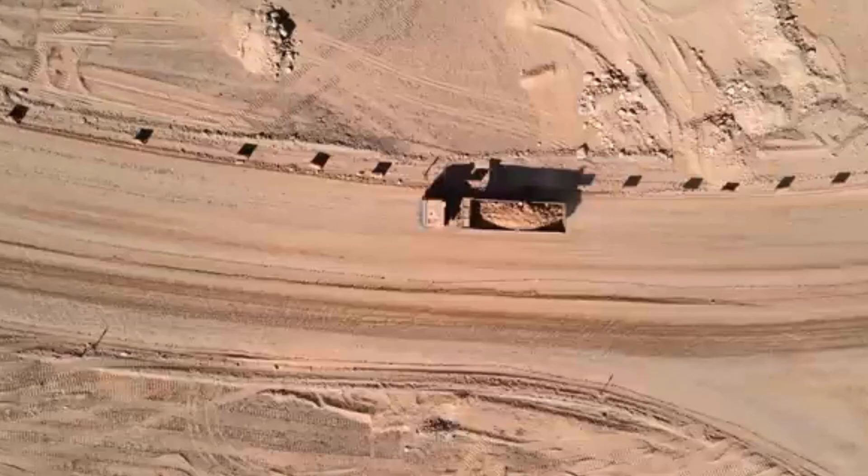Gaze upon this image of the Arabian desert, and you'll witness one of history's most ambitious construction projects taking shape. A 200-meter-wide trench stretches from the Hijaz Mountains to the Gulf of Aqaba. And that's not all. Observe this, the initial phase of what will become the largest set of foundations ever constructed.

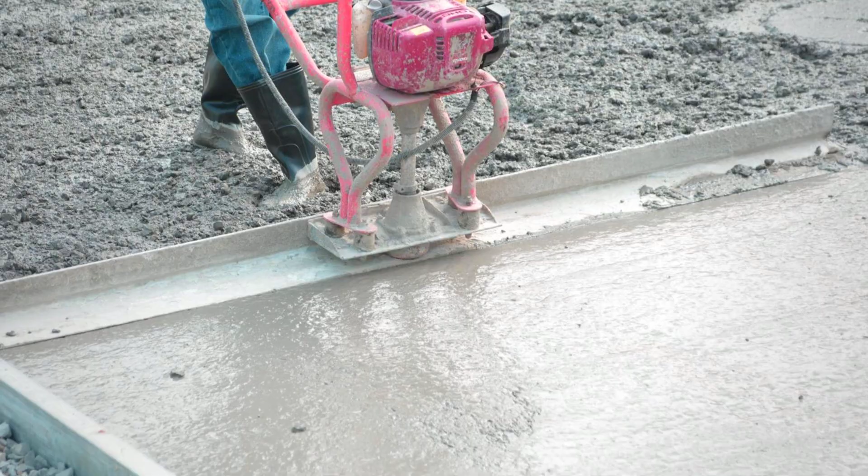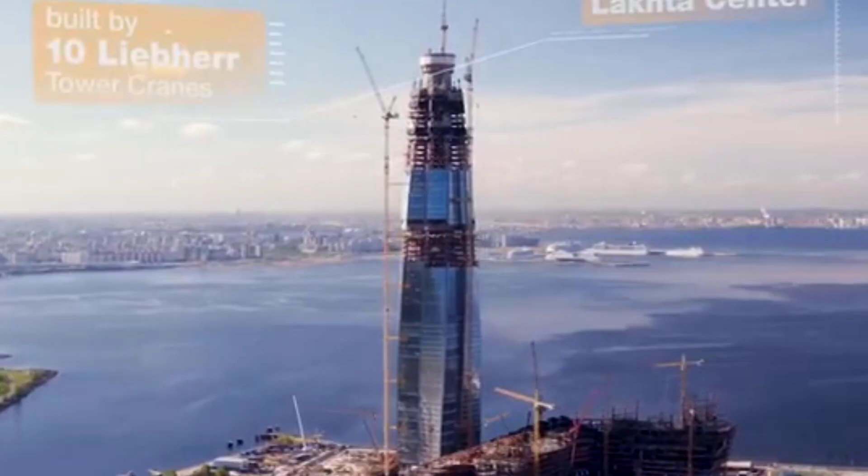Now that the concrete has cured, the first vertical structures are poised to emerge. In essence, the endeavor that everyone dismissed as impossible, as something that could never be built, is actually materializing. Or is it? While proponents suggest vertical construction could commence by the end of this year, experts in real estate warn that hope is not a strategy. For every sign of progress, there are persistent budget issues threatening to bring the entire project to a standstill.

Saudi Arabia has reportedly asked consulting firms to conduct a strategic review of the line, and rumors even circulate that the entire undertaking has been cancelled. But what do we truly know? The year 2026 is poised to be a make-or-break moment for the line. This is when deadlines must be met, and progress will be measured in height, not just hype.

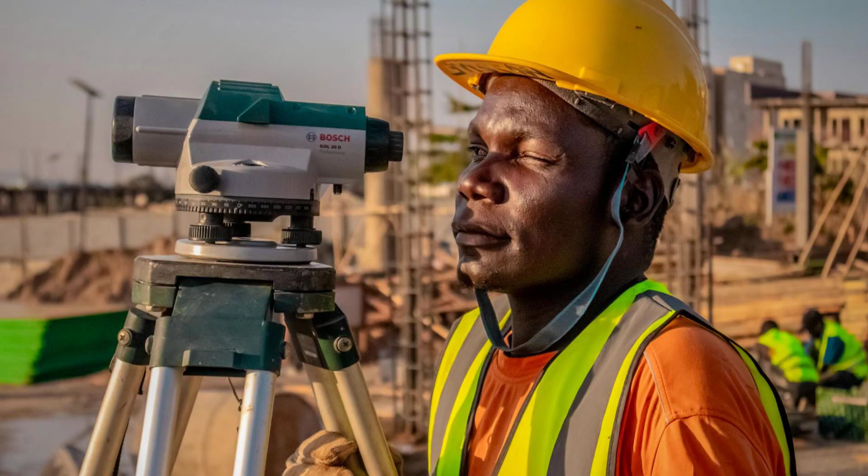Regardless of your opinion on this project, or even its realism, a nation's future hinges upon it, and a leader has staked his entire reputation on its success. They declare it can be done, but such declarations cannot persist indefinitely without tangible proof. So, will it ever truly be built?

Let's find out. For those unfamiliar, this is the line, Saudi Arabia's blueprint for a colossal linear city. If, or when, it's completed, it will serve as the capital of Neom, a vast new region in the country's northwest, conceived by Crown Prince Mohammed bin Salman. It forms a cornerstone of his Vision 2030, an ambitious plan to diversify the country's economy away from oil dependency by, you guessed it, 2030.

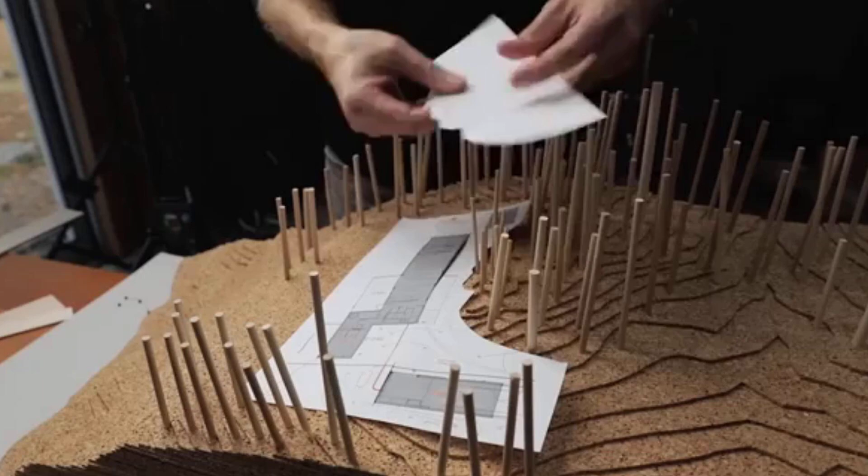The figures behind the line are staggering. It's projected to be 200 meters wide, 500 meters tall, and span 170 kilometers across the desert. The sheer scale is difficult to comprehend. To provide some perspective, consider this small Lego model of the line, built to just 2 bricks high. This model represents a mere 0.03% of the actual line's size.

To further illustrate, this would be the Empire State Building, which the line would absolutely dwarf in height. Just imagine its incredible length. The burning question, shared by many around the world, is how on earth do you construct something of this magnitude? Let's begin with the fundamentals.

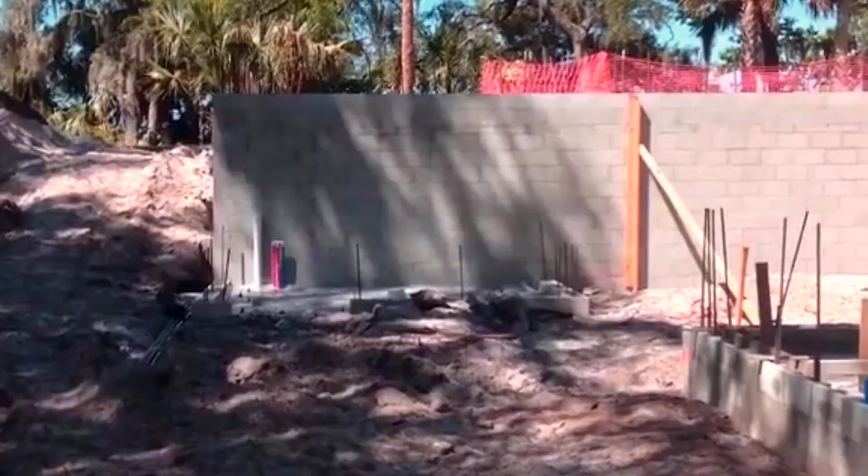The line traverses wildly varied terrain, hard mountain rock, soft open desert, and salty coastal plains. To build anything across such a diverse landscape, you first require a uniform, stable foundation. That's where the foundations come in. Imagine building a skyscraper on unstable ground. Much of the line's site sits atop quaternary deposits, essentially loosely deposited, uncompacted material unsuitable for bearing significant weight. Beneath this material, however, lies solid bedrock, an ideal surface for construction.

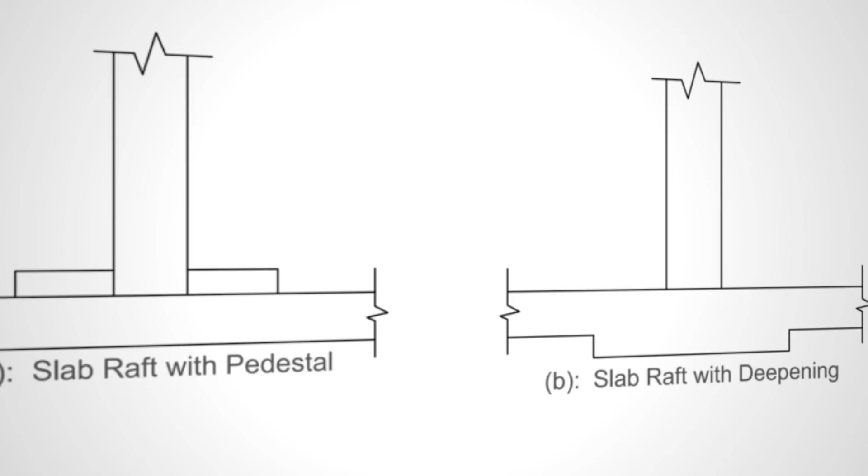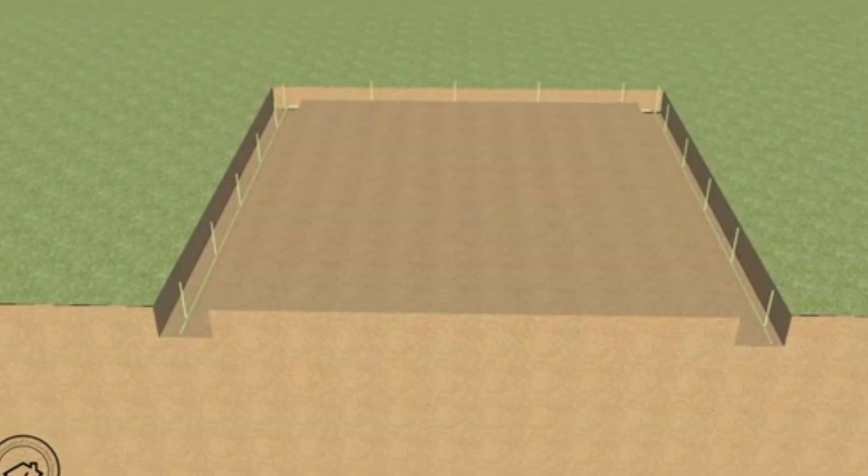To reach this bedrock, engineers employ what's called a piled raft foundation. This involves creating a robust concrete slab at ground level, with the building's weight transferred through piles driven deep into the stable bedrock below, bypassing the weaker upper layers. The result is an exceptionally strong and stable base for any skyscraper. This might sound straightforward, but it is far from simple. Designing foundations for any structure, let alone one of this size, demands immense calculation.

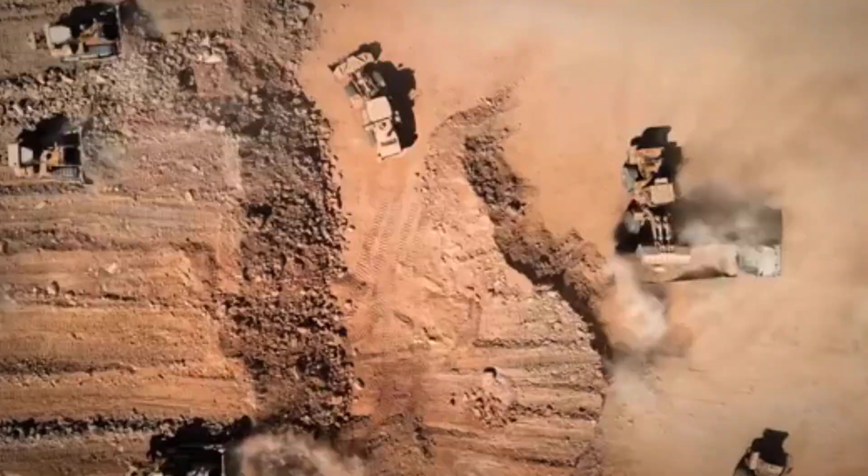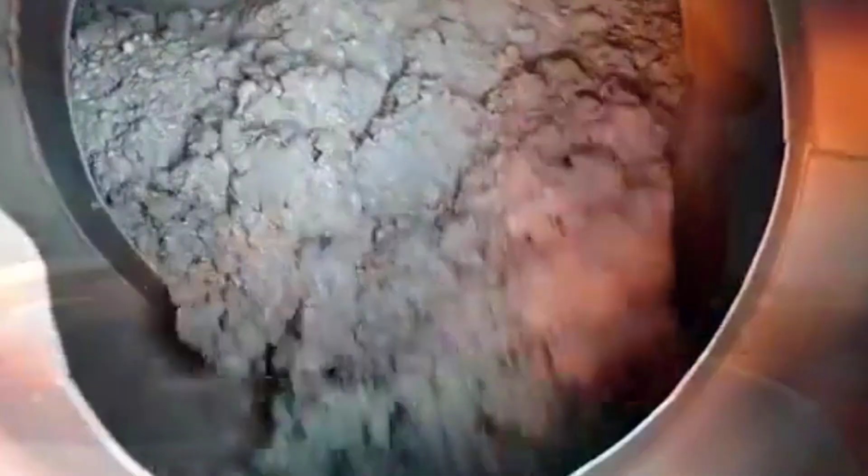The work currently underway on the line surpasses anything ever seen before. Phase 1 alone has involved driving over 16,000 piles up to 70 meters deep into the Saudi sand. This equates to nearly 1,000 kilometers of drilling, consuming up to 3.5 million cubic meters of concrete. On top of this, an 8-meter-thick raft will form the base for all subsequent construction promised by this colossal project.

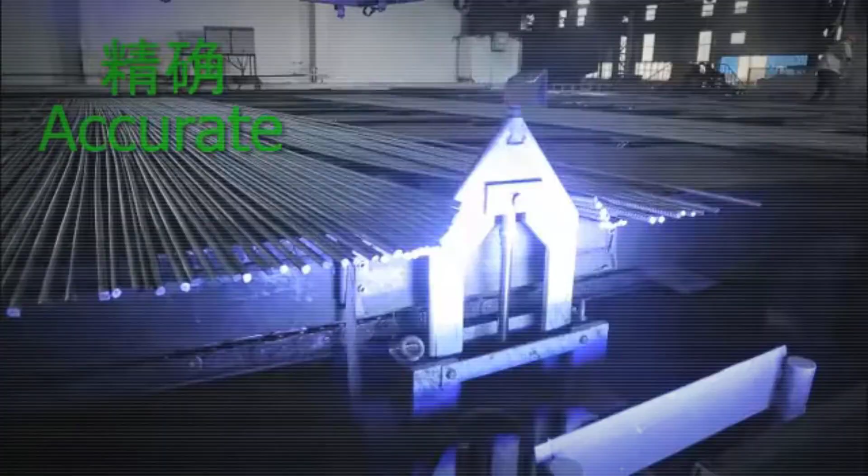To achieve this, an automated factory is mass-producing tens of thousands of 32-meter-long rebar cages to reinforce each pile. Simultaneously, drilling rigs utilize GPS for precise boring of the holes into which these rebar cages are lowered. A biodegradable liquid is then pumped into the holes to prevent collapse before the concrete is poured. Engineers aren't just contending with soft earth. Being so close to the sea, this stretch also requires protection from highly saline groundwater.

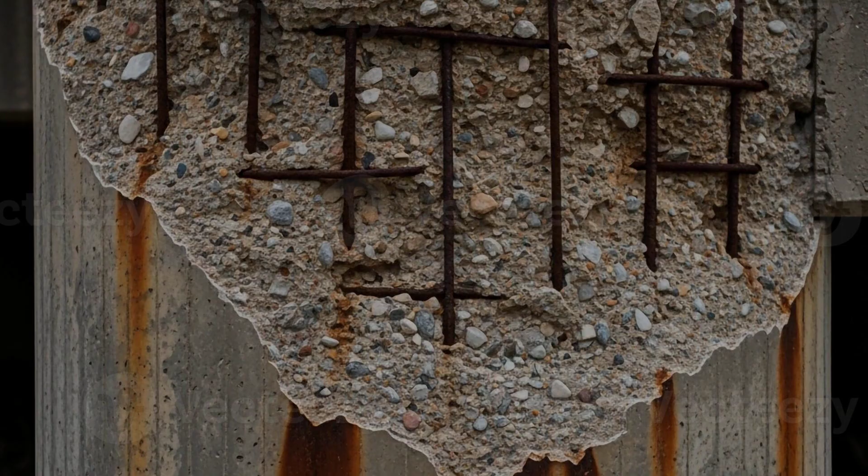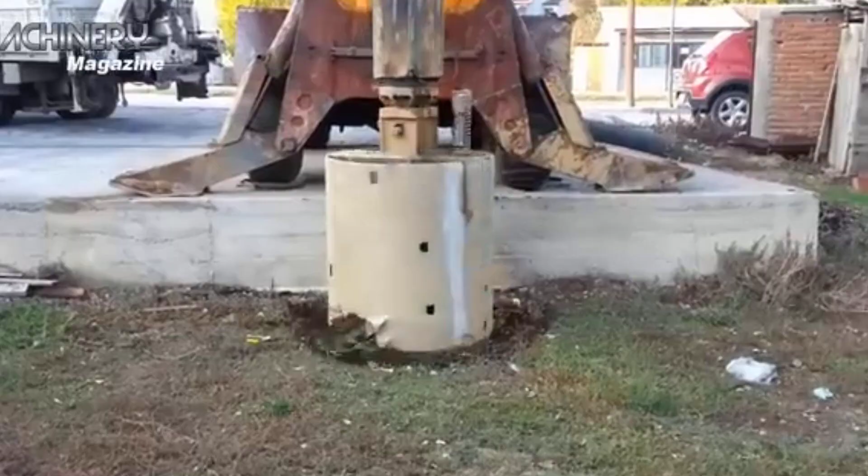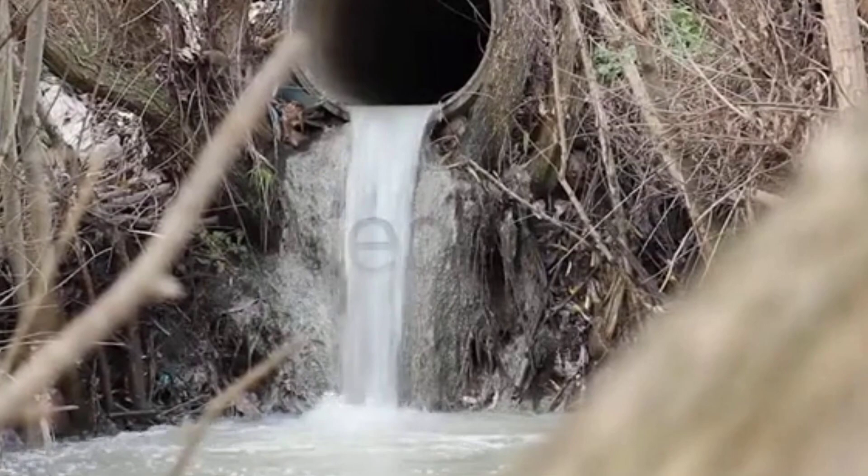If left untreated, it could corrode the steel cages and concrete piles over time. To combat this, the world's largest dewatering system has been implemented. 500 wells were drilled along this section of the line, each fitted with a water pump at its base. Water is extracted at a rate of 90,000 cubic meters per hour, directed towards a settlement pond where its quality is rigorously checked. From there, the water is filtered and discharged into the sea via a series of pipes.

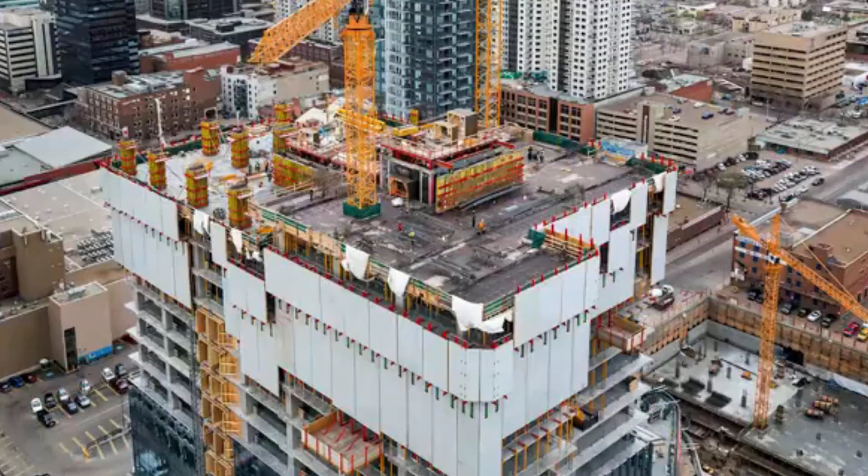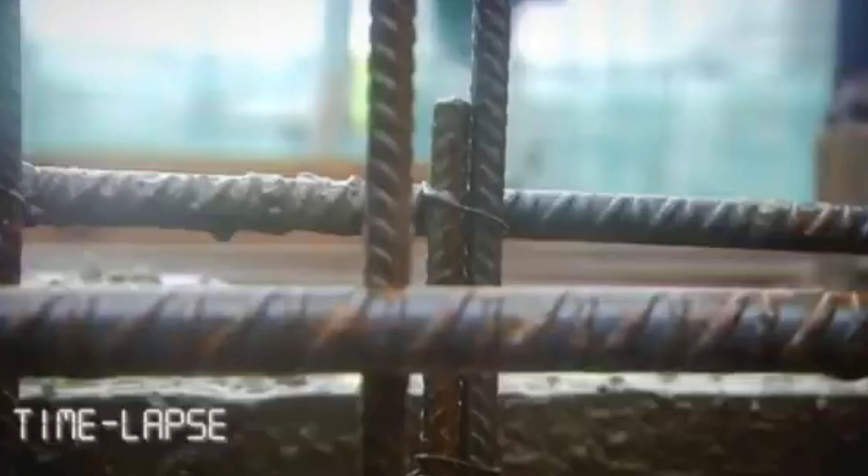Work on the foundations for Phase 1 is nearing completion, meaning the project is about to reach its next major milestone, going vertical. On a typical skyscraper, this involves constructing the core, the building's essential backbone. These cores, often seen rising on construction sites, are formed by pouring concrete into a mold that is incrementally pushed upward by hydraulic jacks. However, the line introduces a unique twist.

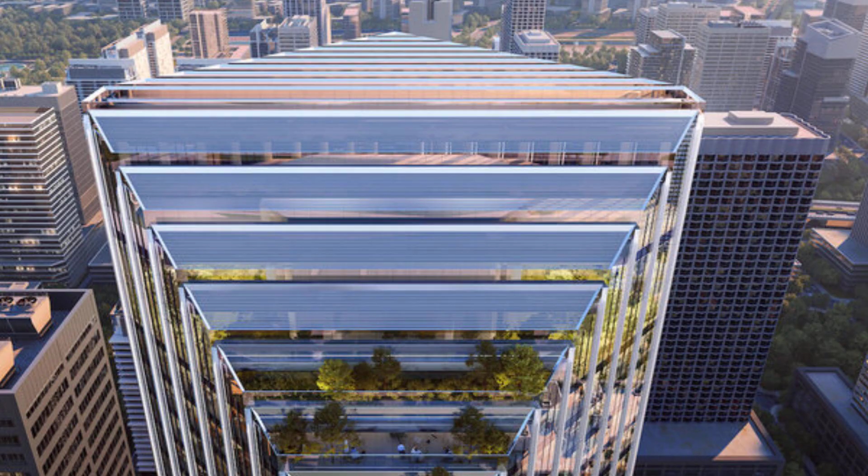Remember, the line is a city, a framework, not a single monolithic building. It doesn't possess one continuous core stretching for 170 kilometers. Instead, it's composed of thousands of individual cores, each built much like any other. Crucially, these cores support the primary decks of the structure, which will serve as the main streets and avenues, with the cores acting as cross streets. Imagine the Manhattan grid, but folded and stacked vertically.

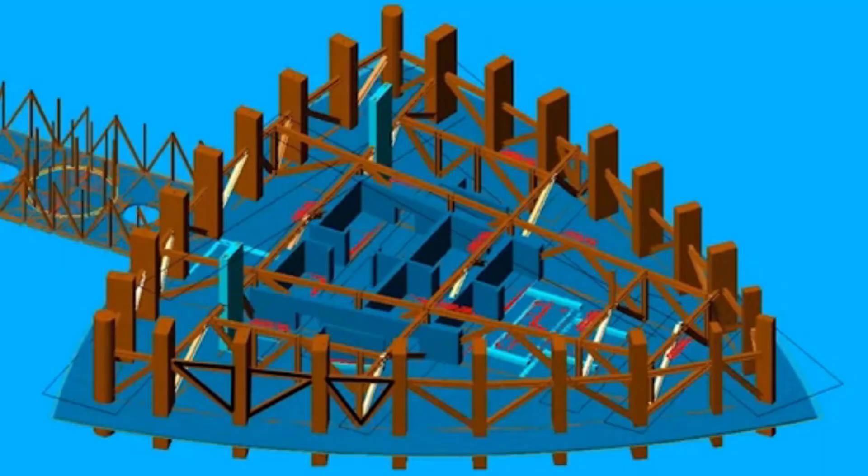Within this framework, the city will truly come alive, housing schools, hospitals, homes, and transport infrastructure, everything required for a functioning metropolis. This framework is what is currently under construction, 2 rows of 500-meter tall towers. Phase 1 will see 4.8 million tons of steel outrigger beams hoisted into place to support the 5 decks running through each module.

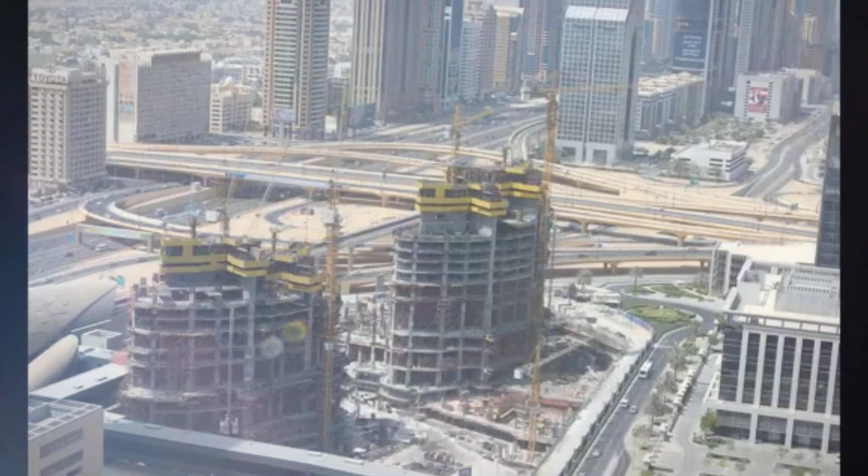Typically, in skyscraper construction, steelwork and cladding begin to be added at an earlier stage, following the core up the building. This is why 2026 is so anticipated. Things should really start to take shape, and we should see rapid progress. But can it actually be built? That's the trillion-dollar question. Let's start with concrete.

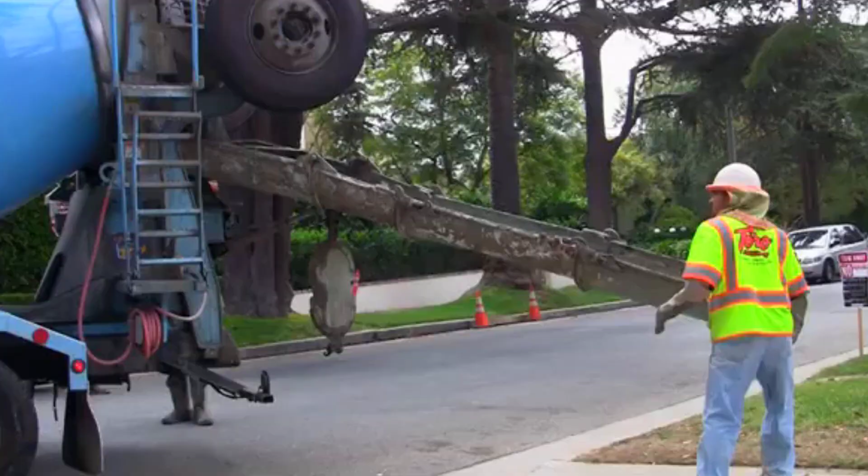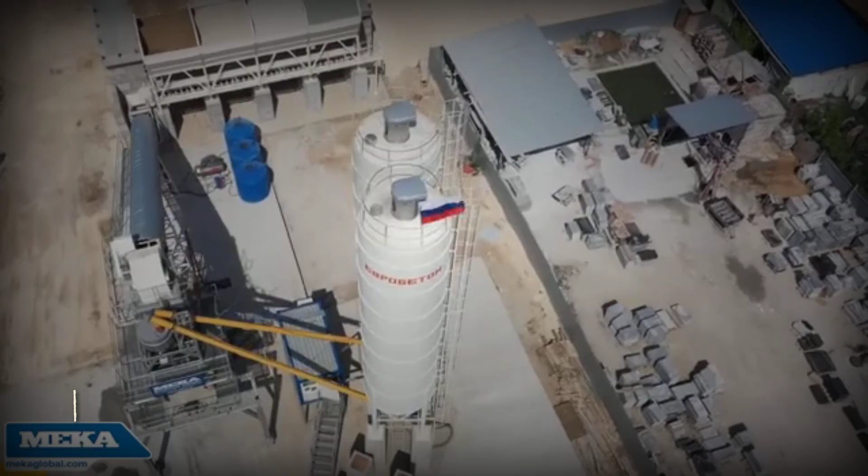Pouring concrete at scale is incredibly complex. Pour it too slowly, and it sets unevenly. Pour it too fast, and the ingredients can separate. If the mixture is too wet, the concrete will be brittle; too dry, and it will resemble Swiss cheese. Essentially, it demands absolute consistency over extended periods.

Millions of tons of concrete have already been poured, which is a solid track record. But this has primarily occurred on the coast, with easy access to supply lines. The city still has a long way to extend into a vast hinterland with no local material access and a near-total lack of one vital ingredient: water.

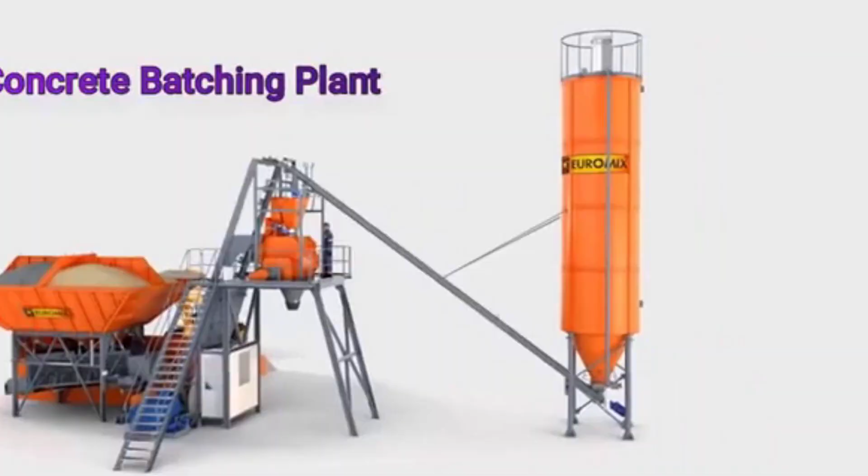There is a plan. It begins at Oxagon, another of NEOM's megaprojects, where a massive desalination plant is intended to pump billions of liters of seawater to reservoirs distributed along the city's length. These reservoirs would feed a $190 million network of concrete factories capable of producing 20,000 cubic meters of concrete daily. But there's a significant catch: none of this currently exists.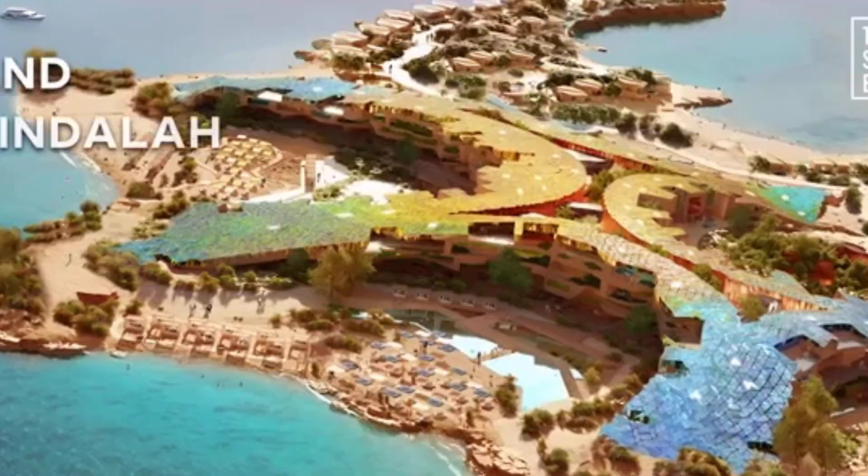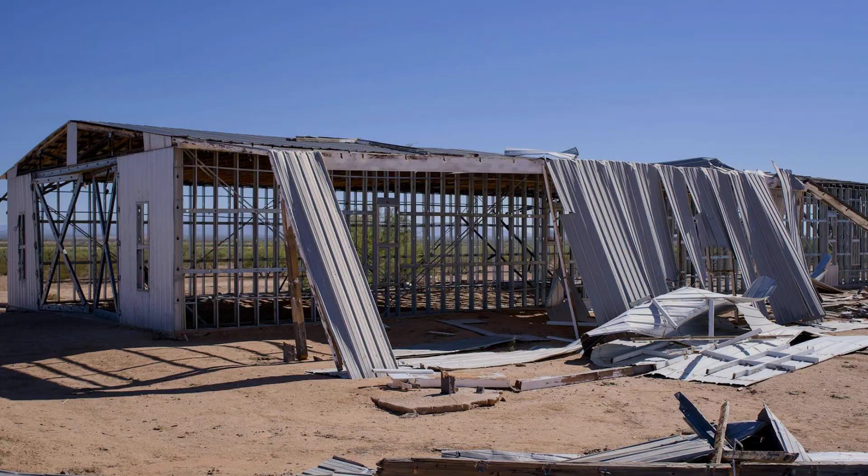Work on Oxagon only began in mid-2025. Those vast concrete plants are still a distant prospect, and concrete is currently produced locally, with water shipped in by tankers, by no means a scalable solution. In fact, unconfirmed reports have recently surfaced suggesting the desalination plant has been quietly abandoned.

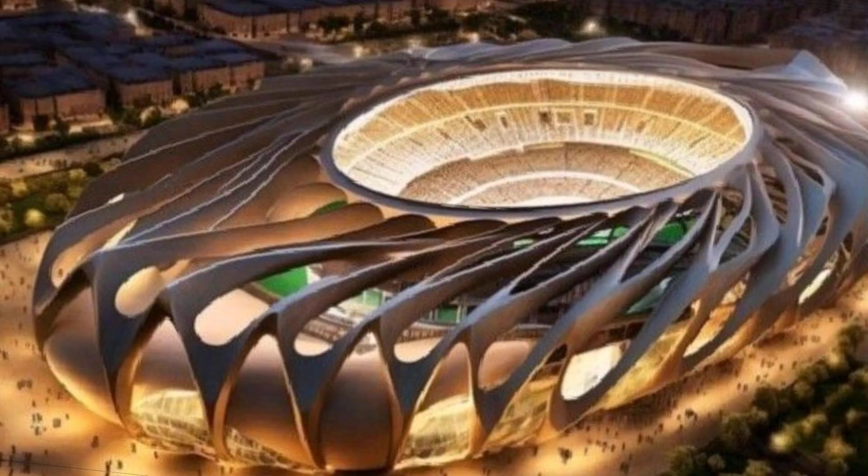This isn't merely nitpicking. The line has extremely ambitious targets to meet in less than 9 years. The NEOM Stadium is slated to be suspended 350 meters in the air inside the line and is set to host games at the 2034 FIFA World Cup, games for which people will be buying tickets. For this to be credible at this stage, one would expect to see far more evidence of scalable activity. Instead, as of late 2025, the project appears to be constructing anything, just to gain momentum and silence critics.

So, what exactly are they building? What is this Phase 1 we keep mentioning? When you saw the massive trench in the desert, what did you imagine would be built? The entire structure? Half of it? At least a quarter? No.

Despite constructing that enormous 170-kilometer-long cutting through the desert, they are actually only building Phase 1, a mere 2.4 kilometers of the line. While this is still an absolutely massive building in its own right, it accounts for less than 1.5% of the entire line structure. This might feel a little underwhelming, but there is a strategic rationale.

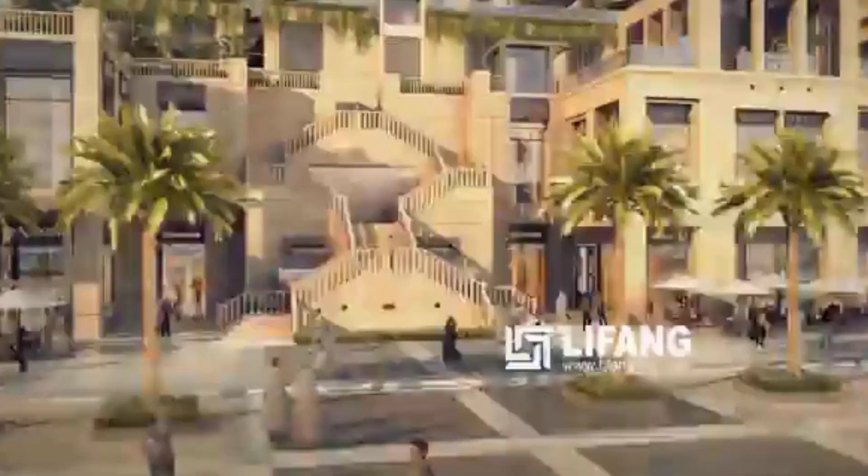The NEOM team is using Phase 1 to construct some of the city's largest and most spectacular anchor assets. An anchor asset, once completed, attracts investment and development to the surrounding area. A prime example is the High Line in Manhattan, a derelict elevated railway transformed into a public park, which subsequently revitalized the surrounding area into one of Manhattan's most expensive and coveted neighborhoods.

The entire structure of the line is divided into 800-meter-long modules, akin to neighborhoods or city blocks. Phase 1 will see 3 of these modules built near the western end of the site, featuring some of the city's most spectacular elements.

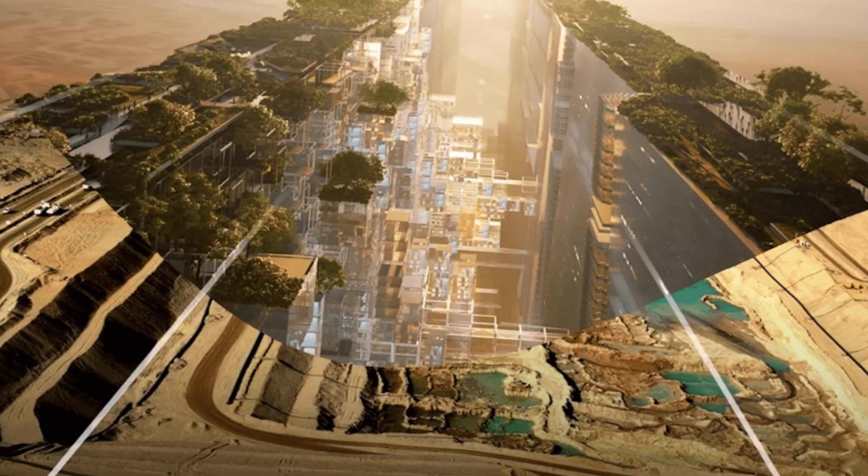These include a man-made marina capable of hosting the world's largest cruise ships, the 46,000-capacity NEOM Stadium, and a vast chandelier hanging below, designed to welcome people into this colossal structure. NEOM's stated goal is to fund and build a collection of anchor assets around which subsequent phases will organically develop. In many respects, this strategy makes a lot of sense, being sophisticated and based on industry-wide standards.

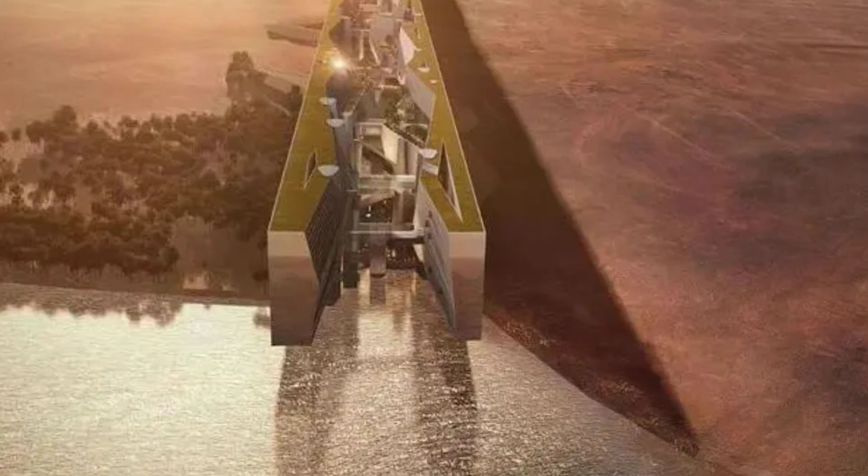Where it becomes questionable is that this is a 170-kilometer-long city in the desert. The line is intended to be a revolutionary city that redefines urban living in the most audacious way possible, forever changing how we perceive our cities. For an ambitious leader with unchecked power, it's precisely the kind of project to capture the world's imagination. But for everyone else, it carries immense risk.

Development is ultimately a game of finances, and in this case, the purse is controlled by one of the planet's wealthiest individuals. However, fully realizing Crown Prince Mohammed bin Salman's vision will require more capital than he alone possesses, necessitating significant buy-in from private markets, external capital partners, and foreign investors. These investors generally seek more realistic assumptions.

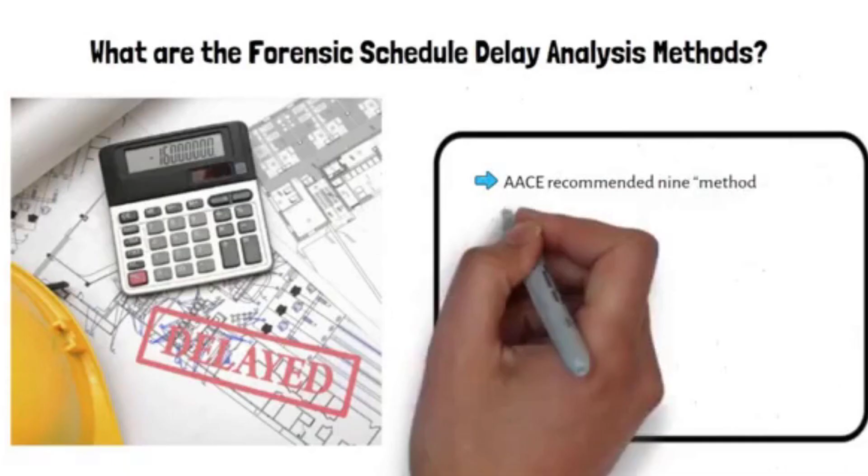Furthermore, the project's leadership faces the challenge of pushing back against some of the prince's more fantastical visions. A simple change of mind, like wanting a curve or a jump over an obstacle, could translate into billions of dollars in cost overruns and months or even years of delays, which is not conducive to large-scale development.

Ever since its announcement, the line has faced intense criticism regarding its alleged human cost. There have been reports of homes, schools, and hospitals being cleared, allegations of modern-day slavery on sites, and orders to execute tribal people who refuse to relocate. These allegations are vehemently denied by NEOM and the Saudi Arabian government.

Beyond this, it has been exceedingly difficult, if not impossible, for journalists to gain real access to the sites, though relationships with the press are handled very differently in Saudi Arabia. Yet, this wall of silence casts a shadow over the project's fundamentals. Many individuals involved with the line were contacted for this video, and almost none would speak for fear of reprisals.

The hard truth is that as Saudi Arabia strives to become a more progressive society and transform its culture as part of Vision 2030, it will need to master its relationship with the free press beyond its borders. People asking questions about this project often encounter a clash of cultures. They seek to understand why costs have tripled, why elements have been replaced or changed, or why there are no updates on certain aspects, but they are dealing with a place accustomed to not having to answer to anyone.

If the line does get built, it won't be the first showpiece city constructed from scratch. Consider Brasilia, founded in 1960, which replaced Rio de Janeiro as Brazil's capital. Like the line, it was built in what was perceived as a remote and inhospitable location. And even more like the line, the city's plan was unlike anything seen before.

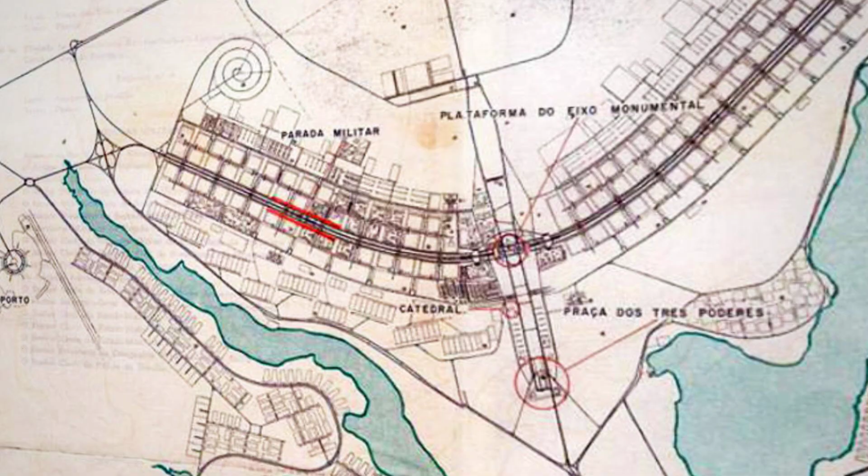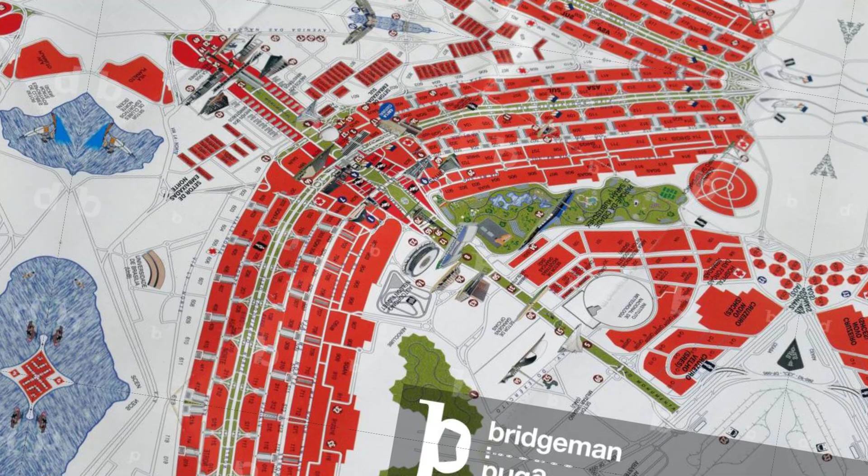Designed in the 1950s, the jet age, when rapid advancements in aviation symbolized the cutting edge and the futuristic, Brasilia was meant to represent a nation reborn in the modern era. It was designed like an airplane, government buildings in the cockpit, housing on the wings, and a military district in the tail. The fuselage formed a monumental axis uniting the entire city.

Just like Brasilia, the line is an attempt to create a new, forward-looking symbol for a nation. But rather than gazing skyward, it draws inspiration from the pages of science fiction. An academic and author, Chris Hables Gray, who has written extensively about cyberpunk, received an email from a Saudi Arabian woman inviting him to discuss input on the line's aesthetics, making it clear that the Crown Prince was very interested in cyberpunk.

The line itself appears to be partly based on elements from Snow Crash, a novel where a virtual reality world was constructed around one long, almost infinite virtual street. Even if you're not familiar with the term, you've likely encountered the cyberpunk aesthetic everywhere, from video games to TV shows and films like Blade Runner.

Chris was one of a handful of people asked to provide background research for what is now known as the line. He collected numerous images and quotes from cyberpunk and related science fiction writings that he believed would be useful, specifically focusing on urban planning and ideas of cyberpunk and other punk genres. He recounted that the prince attended a demonstration or exhibition of these ideas, primarily featuring large images.

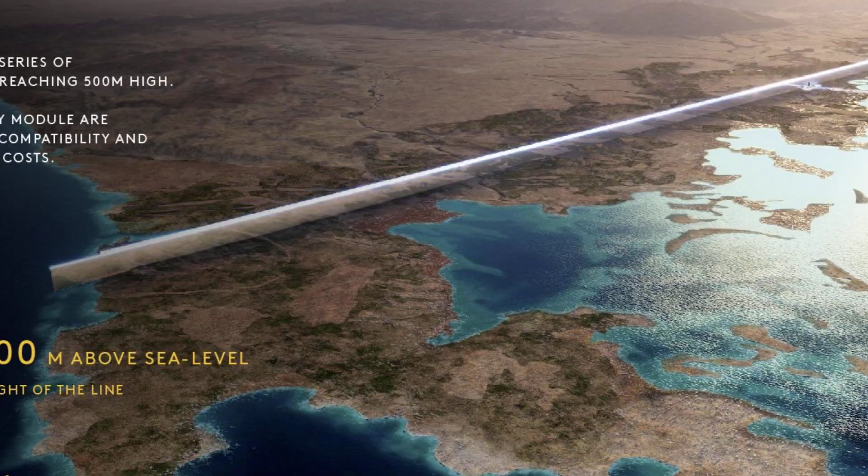The prince then selected what he liked, and these choices were theoretically incorporated into the plans for building the entire city. Looking at some of the images Chris shared with Neom, you can see the clear link with the concept images released in the early stages of the line.

If there's one aspect of the line that seems directly from a video game, it's the distinctive mirror finish covering every exterior surface of the building. Reflective glass is not new, but it comes with disadvantages. The type used on buildings is made by transferring metal deposits onto glass through a highly charged gas, a process called sputter coating. While efficient for large-scale production, it's slightly translucent and reflects, at best, around 40% of light. In other words, it's never as good as a true mirror.

This is Maraya, a remarkable building constructed in 2019, widely believed to be a key inspiration for the line. Initially, it was clad in polished metal sheets, but these quickly deteriorated in the harsh, sandy environment. For a perfect mirror finish, you need a mirror. But mirrors are fragile. In the extreme desert heat, the lamination that binds them can fail, and the silver coating can peel away from its backing. To produce something that could withstand these conditions, an entirely new type of mirror was developed.

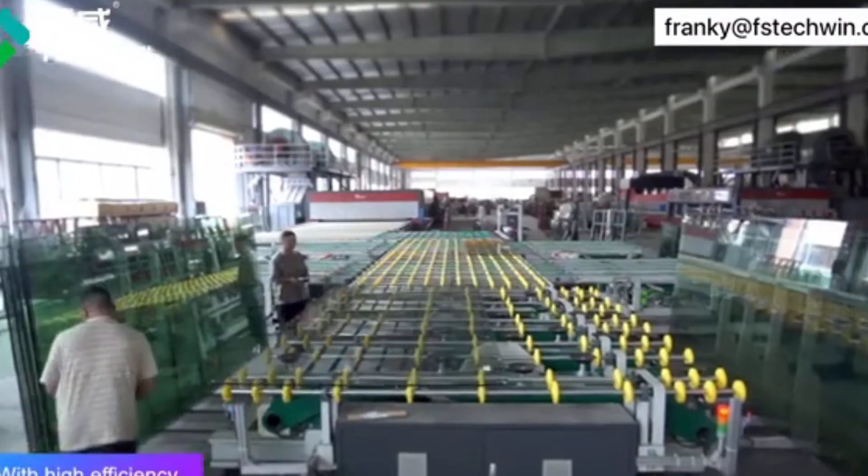Normally, mirrors are made from standard glass, large sheets are produced, cut to size, and then coated with a silver finish. However, to survive extreme temperatures, this glass would also need to be heat-treated or tempered. The mirror coating could only be applied after tempering, but tempered glass cannot be cut. So, to produce the mirrors for Maraya, the entire production line had to be reversed. The raw glass was first precisely cut to its final size, then heat-treated, before being returned to its initial factory for the new mirror coating.

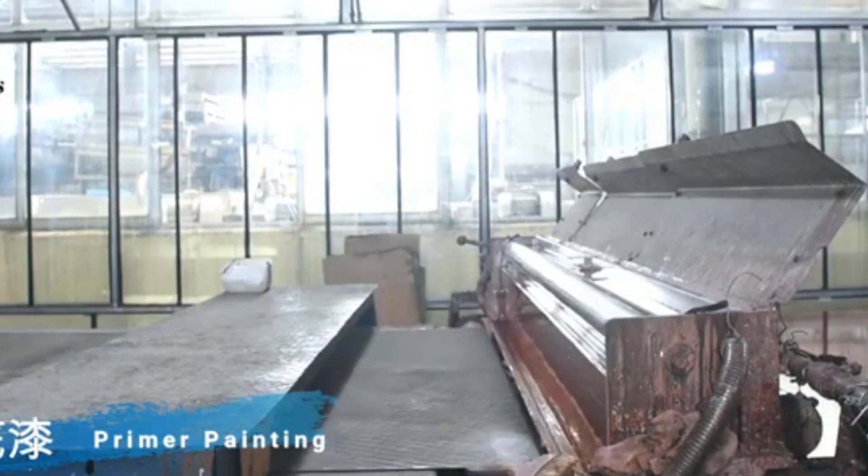Along with a silver spray, the mirrors were coated with copper to provide resistance against intense solar radiation. The result is what you see today, a surface with over 90% reflection that can withstand some of the Earth's harshest conditions.

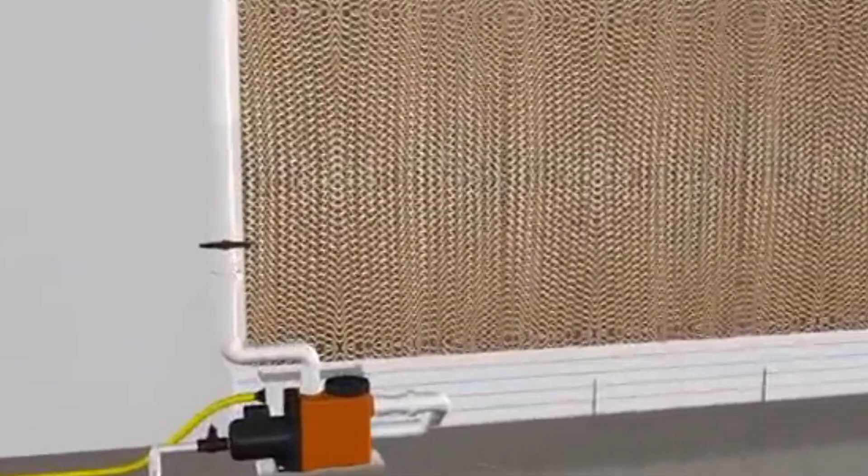Speaking of harsh conditions, here's a major one: the line will not be air-conditioned. That's right. The absence of outdoor cooling was confirmed in a presentation by the line's chief development officer earlier this year. It's crucial to remember this isn't a building, it's a city. So, inside your home or office, you can have as much air conditioning as you desire. But out on the streets, you will be subject to the ambient desert temperature. And if that weren't challenging enough, it could be exacerbated by the urban heat island effect, a phenomenon where cities absorb and retain heat much more dramatically than rural areas.

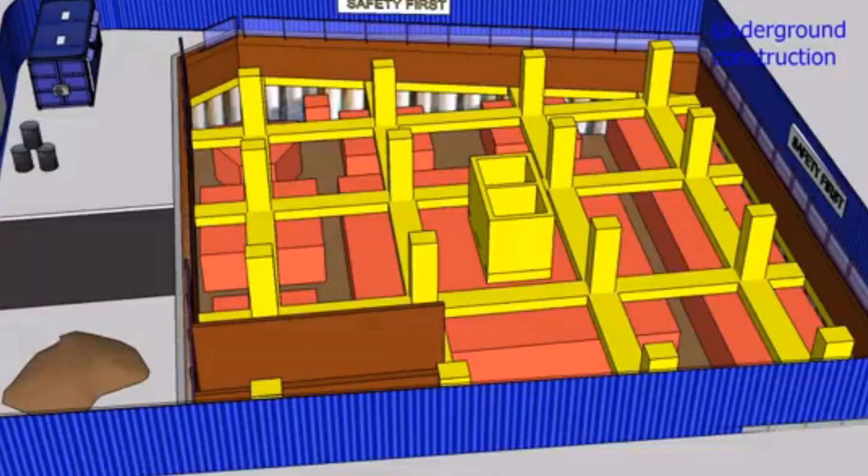In hot weather, for instance, London can be up to 5 degrees Celsius warmer than the surrounding countryside due to its heat-absorbing concrete. And the line will feature a lot of concrete, steel, and glass. This is a significant concern, but currently, all we have is an assurance that this has been thoroughly considered and modeled, and that it will all be fine.

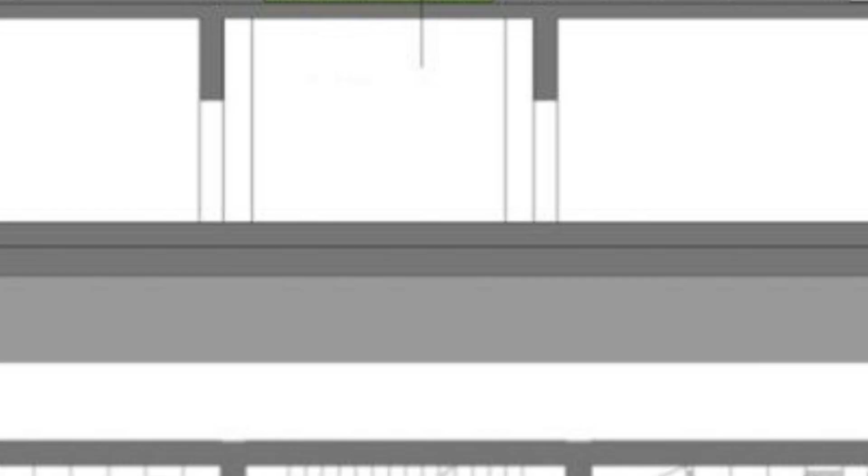One argument made is that the mirror finish of the line's walls will reflect so much light that the city won't absorb much heat. We are also told the glass will be breathable, to allow air to pass through. Whether this means the vast walls will have vents or if an entirely new material is being invented remains unknown. It doesn't exactly inspire optimism.

It appears life in the line will largely be confined within its modules. Each is designed to contain all basic amenities, accessible within a short walk. Essentially, it's an extension of the 15-minute city concept seen in places like Copenhagen or Zurich. But for this to be feasible, you must be able to move around without melting. And if you need to travel further, you'll require some form of transportation.

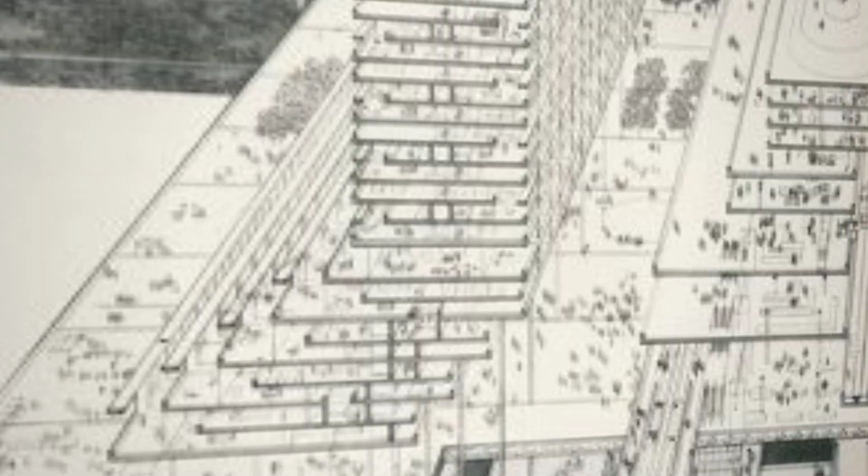Before delving into how transport will function, we need to understand why the line is, well, a line. Apparently, we've been designing our cities incorrectly. Consider London, home to about 8.6 million people, just shy of the 9 million people who could ultimately reside in the fully realized line. London sprawls across a sizable chunk of southeast England. Now, compare that to the line.

The argument is that London represents the old way of building cities, unplanned, sprawling, and inefficient. Wouldn't it be much neater to house all those people in this sleek, technologically advanced structure? To achieve this, one key element needs to be eliminated: cars. Cars, while a major contributor to Saudi Arabia's wealth, are being dismissed as obsolete for the future.

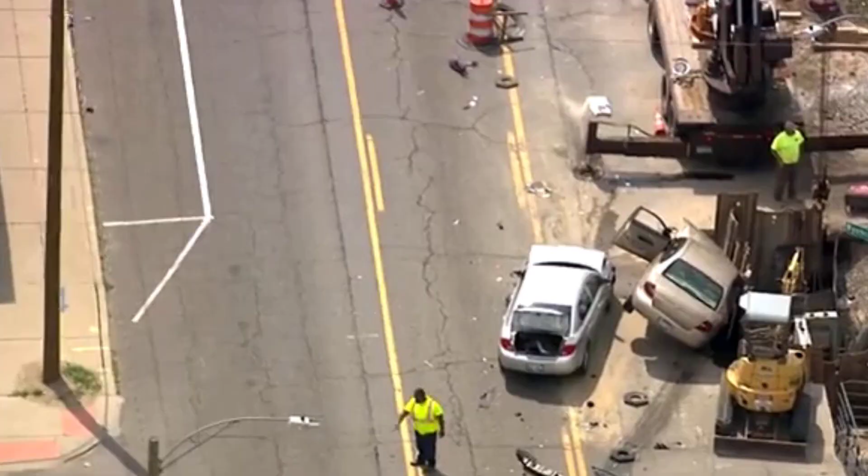They consume vast amounts of space, cause accidents, require parking, and transport few people. The line promises something far superior. At its base, you'll find the line's high-speed railway, connecting the international airport to its western tip. It's supposedly designed to complete the entire 170-kilometer journey in just 20 minutes, faster than any existing train today.

Above this, the line's general mass transit system, a suburban-style rail network, will have stops every 1.5 kilometers. Then, distributed between the line's 5 primary decks, a light rail network will stop every 100 meters. A series of escalators and lifts will connect people between the different levels. This transport system is touted as one of the line's major selling points, claiming its linear shape offers a better, more efficient urban concept. But is that truly the case?

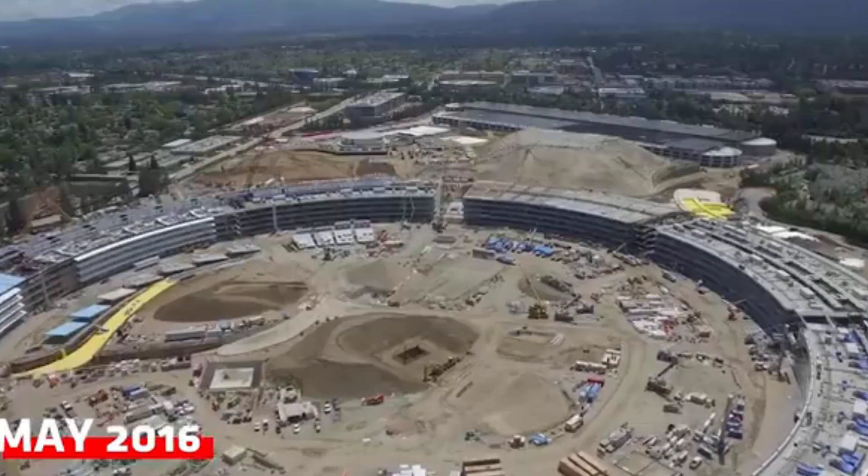To answer that, consider Apple Park, Steve Jobs' last great creation. It shares similarities with the line in its simple, all-encompassing structure, but it's circular. This was deliberate, as a circle embodies certain ideals. In a circle, there's no hierarchy, no top or bottom, no coveted corner offices, and the space inside is equally shared. It's also efficient for navigation. The furthest anyone has to travel is a straight line from one side to another, the building's diameter.

Now, look at the line. To travel anywhere, you primarily have only two options: head left or head right. In contrast, a radial city offers movement in every direction, meaning the average journey will always be shorter. Let's revisit those transport options. We're told we'll be able to traverse the entire 170-kilometer length of the line in just 20 minutes. The China Railway CR450AF, the world's fastest train, though still in development, will have a top speed of 450 kilometers per hour. Even this train could not cover the line's length in 20 minutes, without accounting for acceleration or deceleration.

Moreover, this high-speed line will only have 2 stations, making it largely impractical for residents in the middle of the city. For them, the alternative is a suburban train that stops every 1.5 kilometers. How efficient is that? So, where do we stand? We began this discussion by noting that the line and the broader NEOM project are part of Vision 2030, a plan to completely re-engineer the Saudi economy by the end of the decade and safeguard the country from economic ruin. That clock is ticking, and we don't even know if Phase 1 will be completed by then. Just a few months ago, a detailed investigation by the Financial Times claimed that top-level executives were privately admitting this project was impossible.

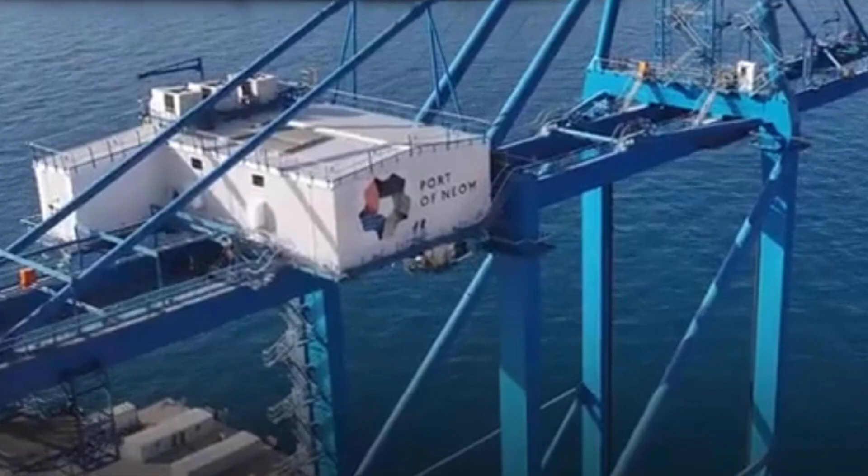This is truly the crux of the entire scheme. When announced in 2021, the line's ambition was so audacious it made headlines worldwide. It compelled everyone to debate what our cities should look like. It inspired children and engaged them in the story of our future. It was so radical it felt almost confrontational, daring people to dismiss it. And with every drone shot showing progress, every satellite image, these were presented like victory laps over those who lacked faith. But we are 5 years in, and this project truly needs to start showing tangible progress. 2026 is being touted as a pivotal year, when things are truly supposed to take shape. But if that doesn't happen, then all bets are off.

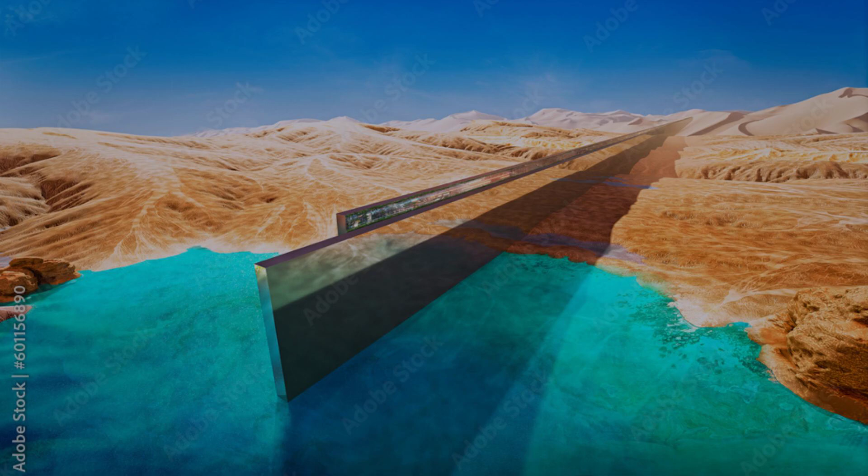It's tempting to think that if anyone could build something like this, it would be Saudi Arabia, with its unchecked power and vast resources. But as we've seen, it's not solely up to them anymore. Ultimately, it all boils down to money, and while the purse is controlled by one of the richest men on the planet, fully realizing the crown prince's desires will require more capital than that purse holds. It will necessitate significant buy-in from private markets, external capital partners, and foreign investors. Generally speaking, these entities seek more realistic assumptions.

Even if it does get built, the question of livability remains. Will this be a functioning city? Will it be a place people genuinely want to live, or merely visit? Some experts suggest there's a very tiny chance, perhaps 10%, that in 10 years, there might be some facilities and a segment of the line where wealthy individuals marvel at it, with ongoing promises of further construction, resorts, and more refuges. Most likely, however, much of it will be abandoned. There's no question that if this project is completed, it will be one of the greatest achievements in human history, the modern-day equivalent of the pyramids. But that is a very big if. This project has its roots in cyberpunk, and the next year will be decisive in determining whether it remains mere science fiction or becomes science fact.